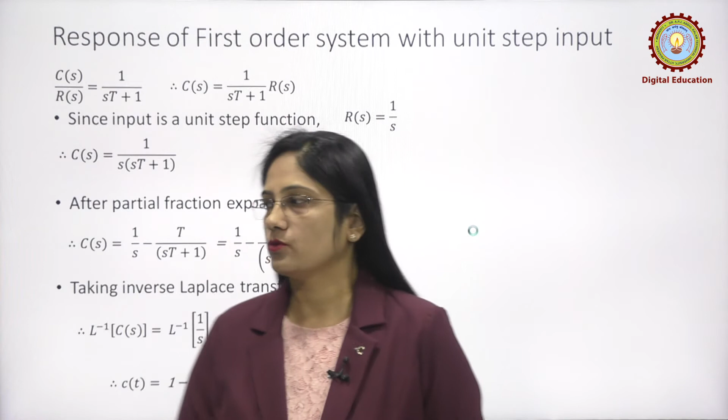So, C of s is the output and R of s is the input. Now the input R of s is a unit step input. So, we are going to check the response of the first order system with a unit step input. C of s is equal to the closed loop transfer function times R of s, shifting R of s to the other side of the equal sign.

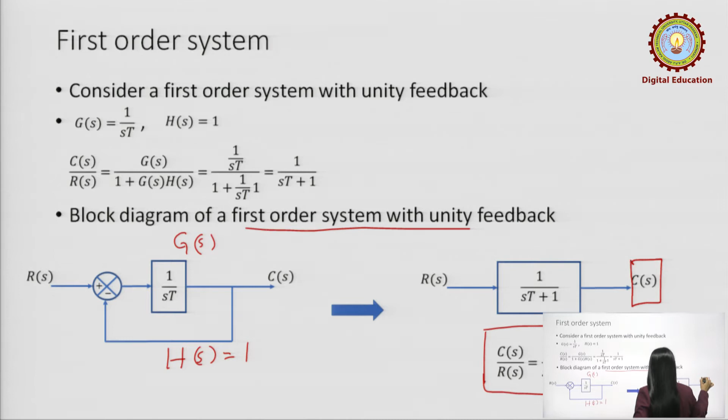Now, since input is a unit step function, the Laplace transform of a unit step function, R of s, is 1 by s. Therefore, the input is a step input and the output of the system, C of s, for a unit step input is 1 divided by s(sT plus 1). So, this is in the s domain.

Now, we need to know the output of a first order system to a unit step input in terms of time domain. So, we are going to find the value of C of t for a unit step input. Applying partial fraction expansion, we get 1 by s minus T divided by sT plus 1. This second term can be rewritten for convenience as 1 divided by s plus 1 by T.

Now, taking the inverse Laplace transform, the inverse Laplace transform of 1 by s is 1 and of 1 divided by s plus 1 by T is e raised to minus t by T, giving 1 minus e raised to minus t by T. So, the response of a first order system for a unit step input is 1 minus e raised to minus t by T. It has an exponential term e raised to minus t by T.

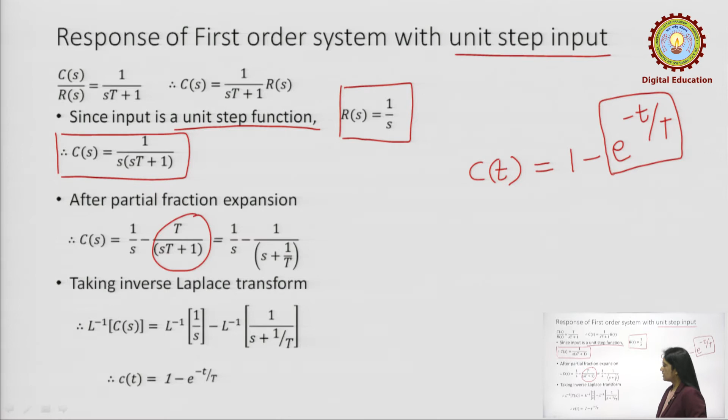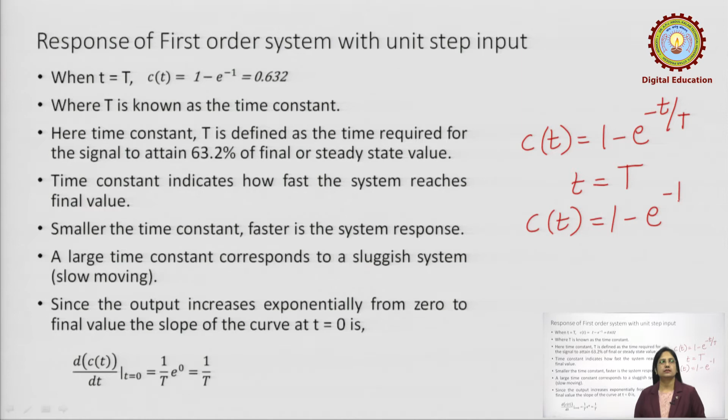Now, let us examine what happens. We have seen that the response of a first order system to unit step input is 1 minus e raised to minus t by T. Now, when t is equal to the time constant capital T, we get the output C of t is equal to 1 minus e raised to minus 1, and this is 63.2% of the final or the steady state value.

So, when the time is equal to the time constant T, the response of the first order system is 63.2% of its final value. We just replaced the time t with the value of capital T, the time constant. Here we can see that this time constant indicates how fast the system reaches the final value.

Final value here means the steady state value, as we know that a system has two responses, that is the transient response and the steady state response. So, we are talking about the steady state value.

Now, smaller the time constant, faster is the system response. If the time constant is large, then it means that the system is sluggish, that is, the system will reach its final value, but if the time constant is large, then it is termed as a slow moving system or a sluggish system.

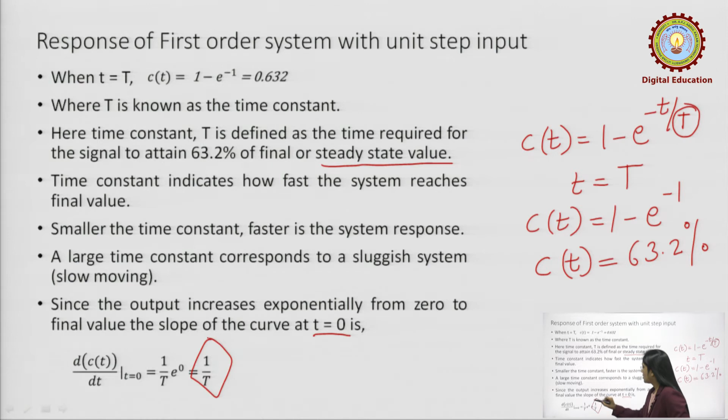And what is the slope of the curve? How do we obtain the slope of the curve? We differentiate the output value, and at t is equal to 0, we get the slope as 1 by T. So, that is what is indicated here. The slope of the curve is 1 by T.

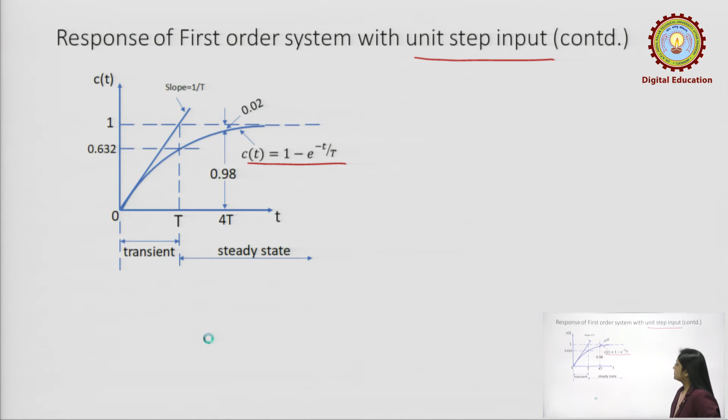As can be seen from the exponential curve, the magnitude of the output response is 63.2% of final value in one time constant. Now, if you again use the same equation of the time response, C of t is 1 minus e raised to minus t by T, and replace t with 2T, that is 2 time constants, then what about the magnitude? We are replacing the small t by 2 time constants. So, what we get?

86.4%. Similarly, for 4 time constants, replacing t by 4T, the magnitude of the output reaches approximately 98% of its final value. So, replacing t by 4T, the value of the response C of t, the time response of a first order system subjected to a step function, is 0.981. So, this graph indicates 4T. This means that the magnitude of the output reaches approximately 98% at 4 time constants.

So, when the actual output is within 2% of the desired output, it is said that the steady state has been reached, that is, the time is equal to 4 time constants. So, this is a typical graphical response of a first order system. The time 4T is known as the settling time for a first order system. This much of value is obtained at 4 time constants, therefore 4 time constants is known as the settling time.

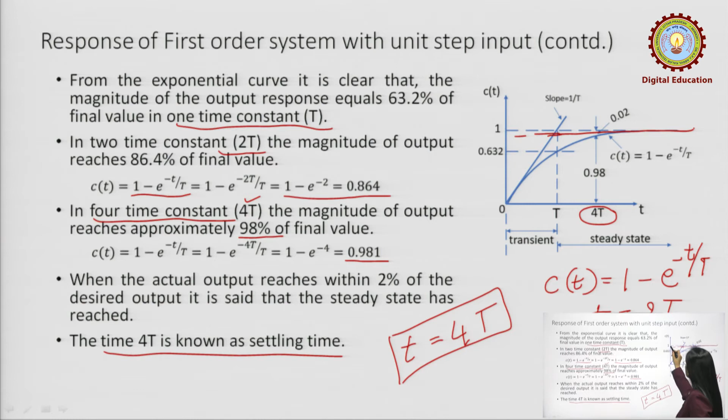Now, what will be the error of the first order system, and how is error calculated? Error E of t is equal to the reference input, which you have given as the step input, minus the output. So, here this 1 is the reference input, the unit step input, so R of t is 1, whereas C of t is 1 minus e raised to minus t by T. So, the error is e raised to minus t by T.

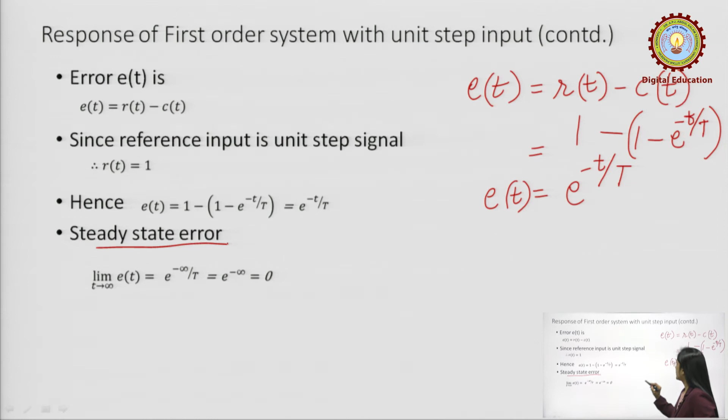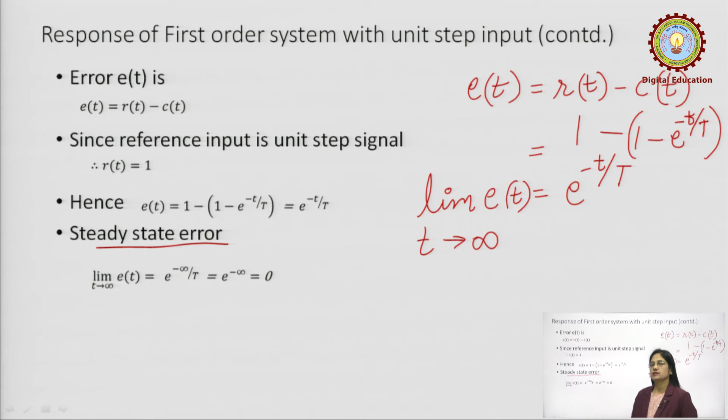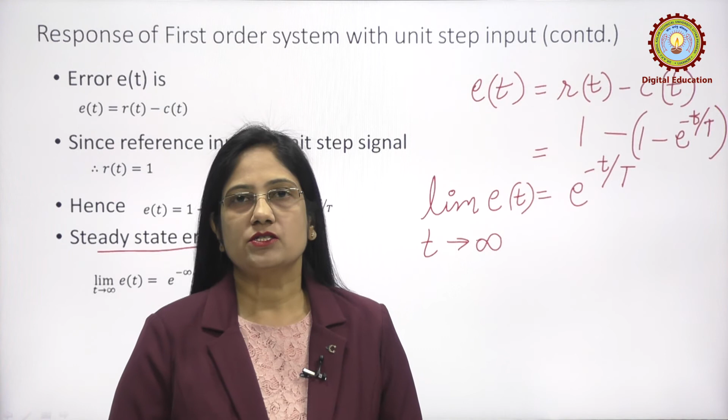The steady state error is obtained by simply applying the limit t tends to infinity. We need to know what will be the steady state error as time approaches infinity. So, for a first order system, the steady state error, normally represented by ESS, as time approaches infinity is equal to 0.

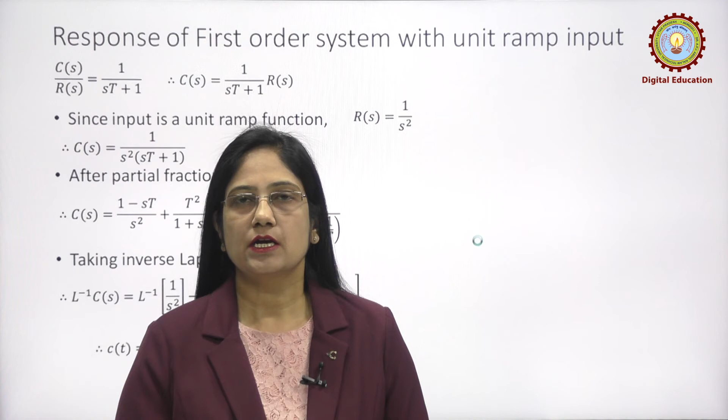Similarly, we will now see what will be the response of a first order system when subjected to unit ramp input. Now, the unit ramp input, as we have seen, R of t is represented with a time value t, and the Laplace transform of a ramp input function is 1 divided by s square.

So, here as mentioned, the output of a closed loop system, as we had seen, is the response of a unity feedback first order system. This is R of s and this is 1 divided by sT plus 1. This is the output C of s. So, C of s is equal to 1 divided by sT plus 1 into R of s, and the input is a ramp function since we are checking the response of a first order system when subjected to unit ramp input. Therefore, C of s now includes 1 divided by s square, simply replacing R of s with 1 divided by s square.

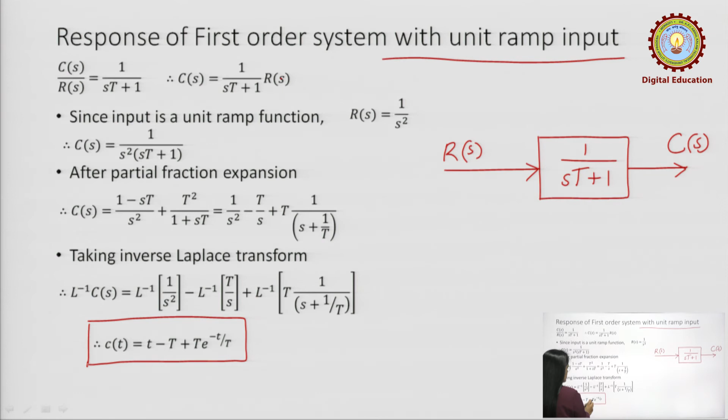Now, after applying the partial fraction expansion, C of s is equal to 1 by s square minus T by s plus T into 1 divided by s plus 1 by T. We have rearranged the function after applying the partial fraction expansion. Now, taking the inverse Laplace transform, we obtain the time domain output, that is C of t of a first order system when subjected to a ramp input, which is equal to t minus the time constant plus time constant e raised to minus t by T.

Now, what is error? Error E of t is equal to t, that is the reference or the input given is the ramp function, which is equal to t, minus the value of the output. Therefore, E of t is equal to T into 1 minus e raised to minus t by T. So, this is the error value.

Now, what is the steady state error? Steady state error is limit t tends to infinity of e of t, which is equal to T plus T e raised to minus infinity in place of t. So, the steady state error ESS is equal to T as obtained by applying limit t tends to infinity. So, it can be seen that there is an error between the input and the output, and that value is T even at t equal to infinity. The steady state error is equal to T, where T is the time constant of the system.

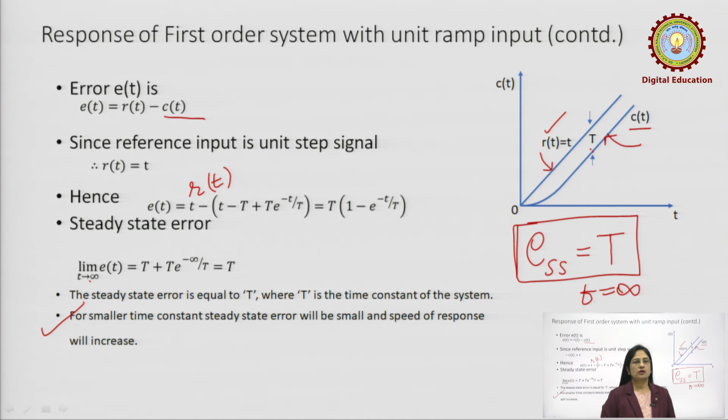For smaller time constant, and this is a point which is to be understood, steady state error will be small and speed of response will increase. Now, similarly, if we are using a parabolic function, the only difference here is we are now mathematically listing out what will be the output response of a system when subjected to different test signals, that is the step function, the ramp function.

Similarly, now if you are applying a parabolic input, this is a parabolic function. The Laplace transform of a parabolic function R of s is equal to 1 divided by s cube. So, what is the response of the system? In the similar way, we are applying partial fraction expansion and taking the inverse. The value here will come out to be C of t is equal to t square by 2 minus time constant into t plus T square minus T square e raised to minus t upon the time constant. So, this is the typical output of a first order system subjected to parabolic input.

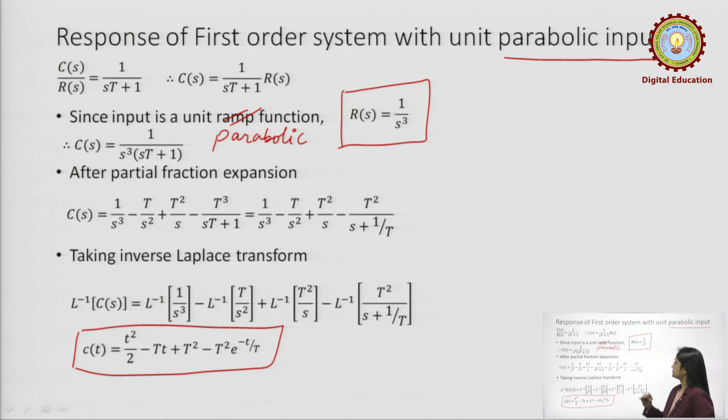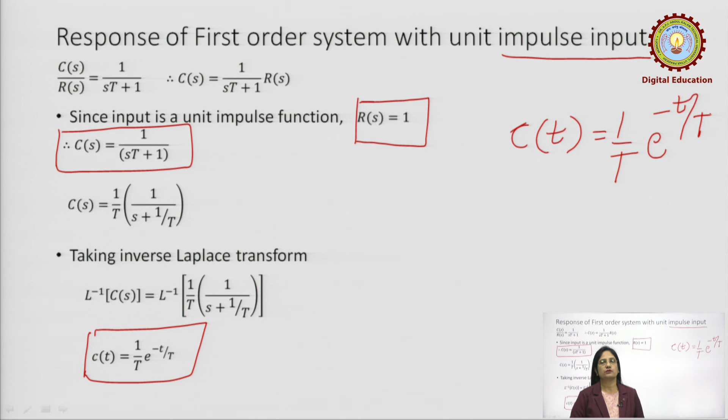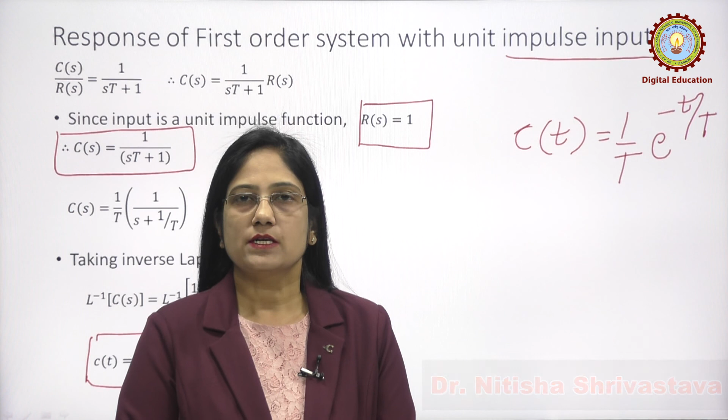So, in this lecture we have seen what will be the time response of a first order system. The forward path transfer function of a first order system is 1 divided by sT, and applying different inputs we have checked what will be the response of a first order system when subjected to the 4 different types of standard test signals.